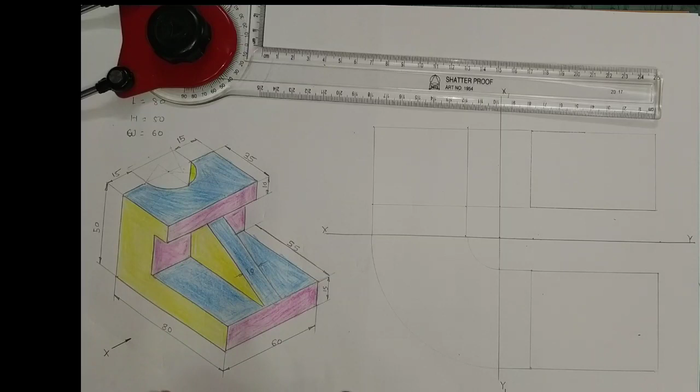Welcome to all. In this video, we shall learn how to draw the orthographic projection of this pictorial view. Along X direction, you will get the front view. Now, from top, here you will get the top view, and here in right hand, you will get the right hand side view of an object.

Let us see. The total length of an object is 80 mm, height is 50 mm, and width is 60 mm. First of all, for solving such a type of problem, draw a box of size 80 by 50 mm in front view. Also in top view, draw a box of size 80 by 60 mm. And in right hand, draw a box of size 60 by 50 mm.

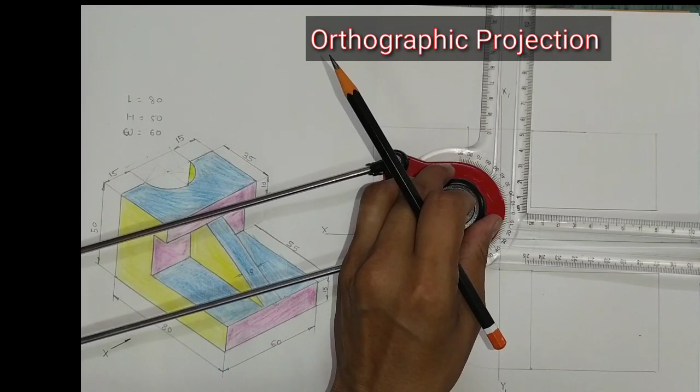Now see, along the x direction, here you will get such type of front view. It indicates the yellow portions. Now we can start this problem from this point. So along the left side you will get total length of size 80 mm. So first of all draw the total length by setting the drafters. So here you will get total length of size 80 mm. Now you will reach this point.

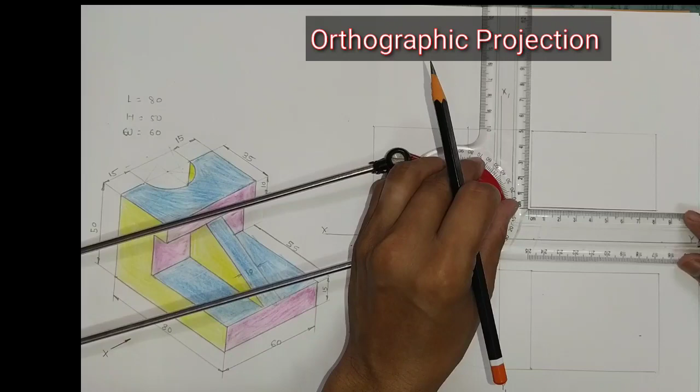After that, height is 50 mm. So from this point take a height of 50 mm. Again along the length, this distance is 35 mm. So from this point take a distance of size 35 mm. Again in downward direction, this height is 10 mm. So take a distance of size 10 mm in downward direction.

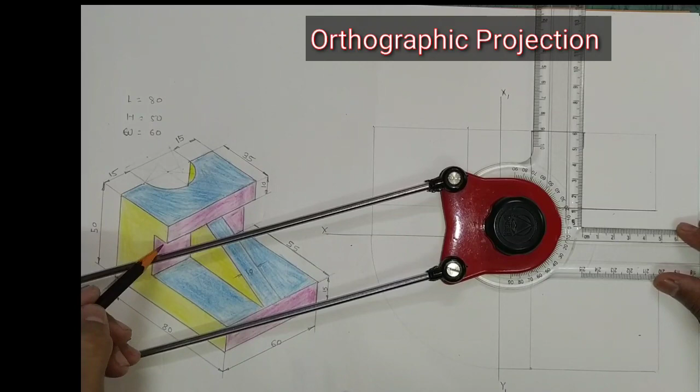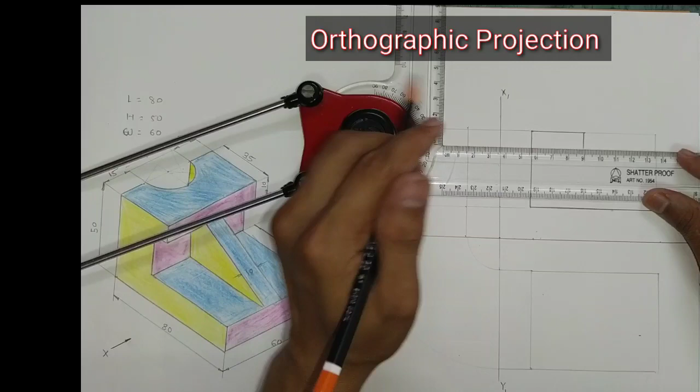Again this distance is 10 mm. How it comes? This distance from this point to this point is 55 mm, and this distance is given 35 mm. So in between, the total length is 90. So 90 minus 80, this distance becomes 10 mm. So from this point take this distance of size 10 mm.

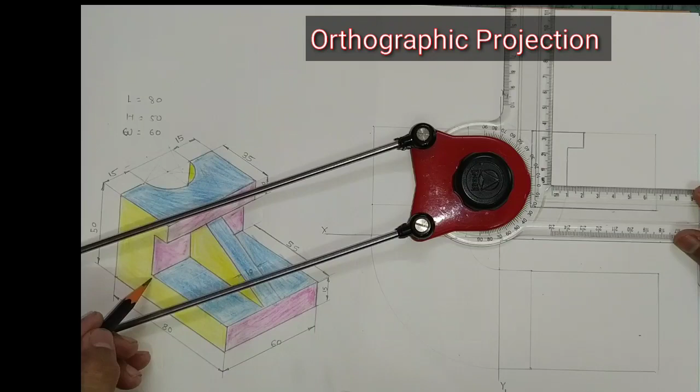Okay, and draw a line in downward direction of size 15 mm. So you will reach this point and draw a straight horizontal line, and this side becomes 15 mm. Okay, this portion represents the front view of an object, which indicates the yellow colors.

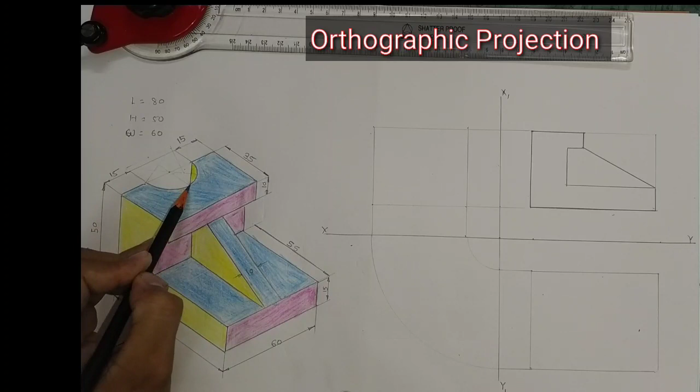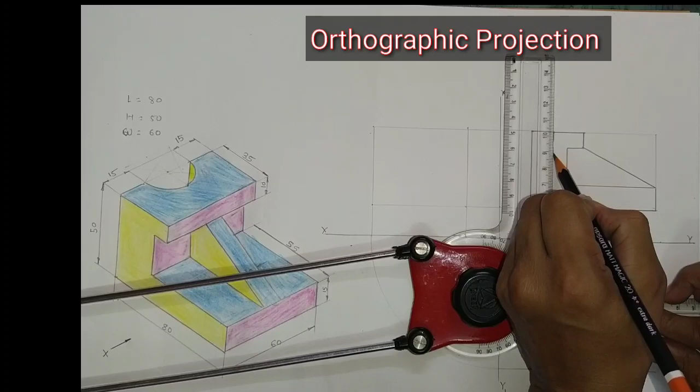Again here a rib is given. Now the rib is joined to the extreme right and below the 10 mm size. Okay, when you are looking from front, you will get the hidden lines. So this is a semicircle, and from this point you will get the dotted lines, and you can draw invisible lines. So what is the position from this point? 15 mm. So from this point take a distance of size 15 mm and draw hidden lines or invisible lines. So this is your front view of an object.

Now while drawing the top view of an object, take all the projections from front view to top view. So take the projection of all points from front view to top view. After that, draw a center line, because in that problem you will get a semicircle of size 30 mm.

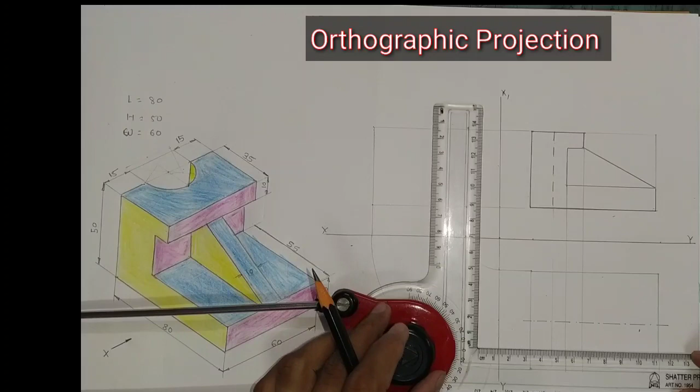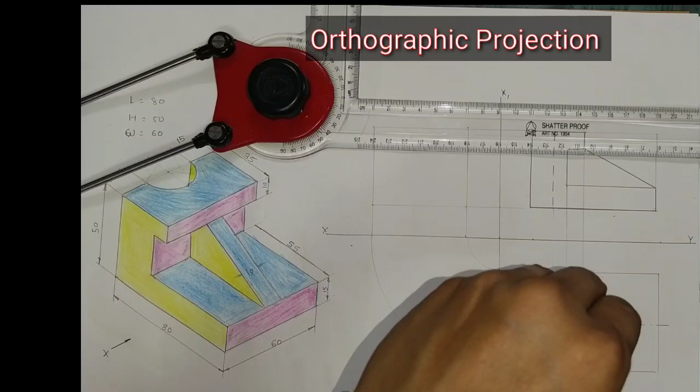Okay. Now in compass, take a radius of 15 mm and draw a semicircle. Take this point as the center and draw the semicircle. This portion represents the semicircle.

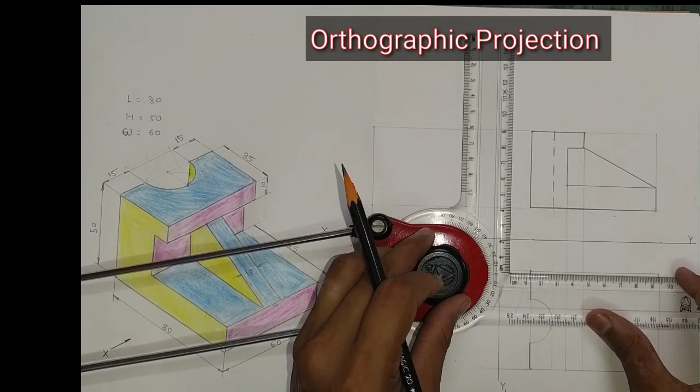After that, here you will get a straight line of size 15 mm. So from this point, draw a straight line of size 15 mm. Similarly, in downward direction, draw another line of size 15 mm. Again here you will get a straight line of size 35 mm. Horizontally draw a line of size 35 mm. Again it goes on straight horizontally.

Similarly, in downward direction, draw horizontal lines and draw a line of width equal to 60 mm. So this is your top view. Again, when you are looking from top, you will get a horizontal line of size 60 mm. When you are looking from top, here you will get a dotted line of size 10 mm. Already you took the projection of this point, so draw dotted lines.

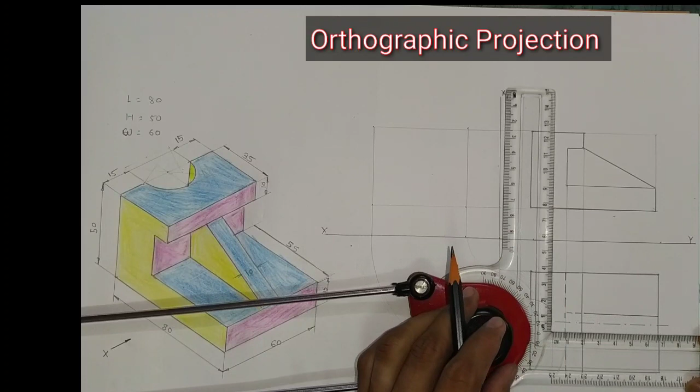Okay. Again, when you are looking from top, you will get a rib of size 10 mm. So take a distance of size 5 mm from the center line, and it intersects the hidden lines. And the remaining parts are rubbed. So this is your top view of the object.

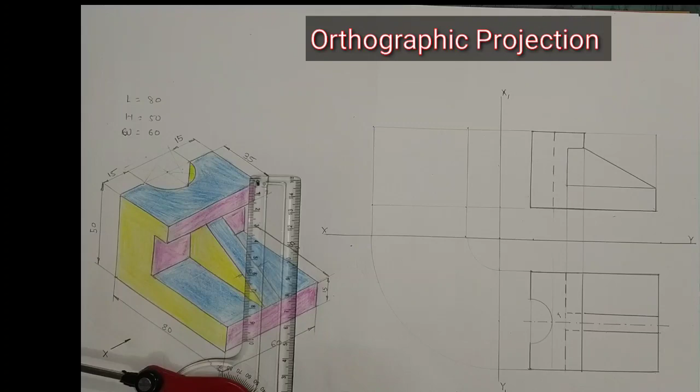Suppose I want to draw the right hand side view of an object. Transfer all the points from front view to side view and top view to side view. So first of all, transfer the points from front view to side view. Again, top view to side view.

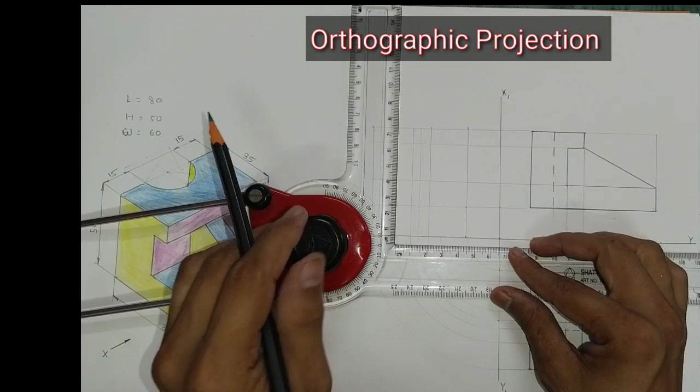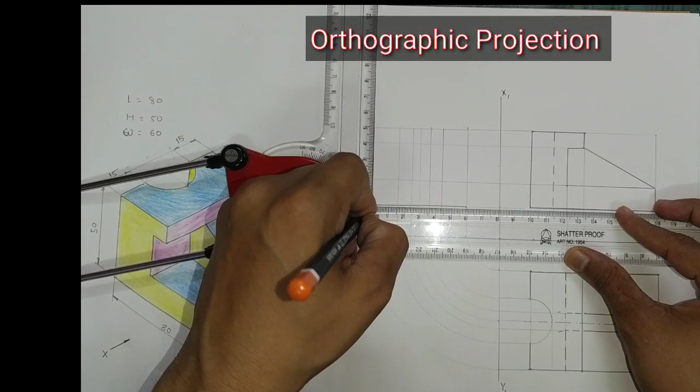Now when you are looking from the right hand side, first of all you will get a rectangle of size 60 by 15 of pink color. So this distance is 60 by 15. Okay, again you will get a rib of size 10 mm. Already you took the projection of 10 mm. So first of all, draw a rib of size 10 mm.

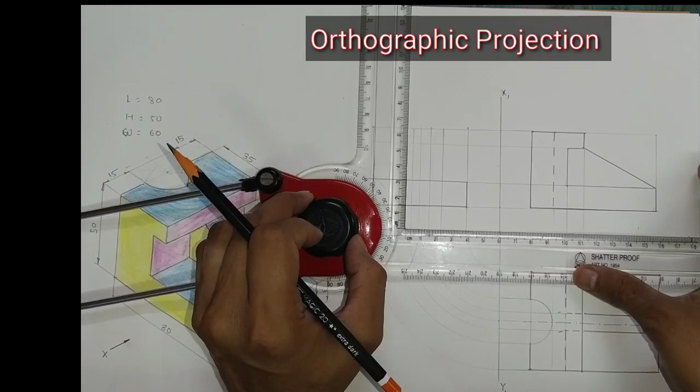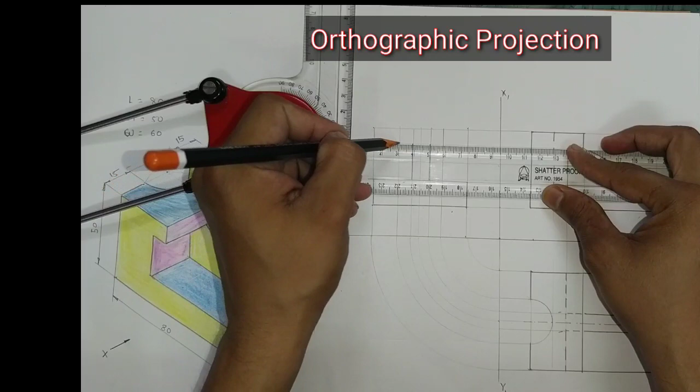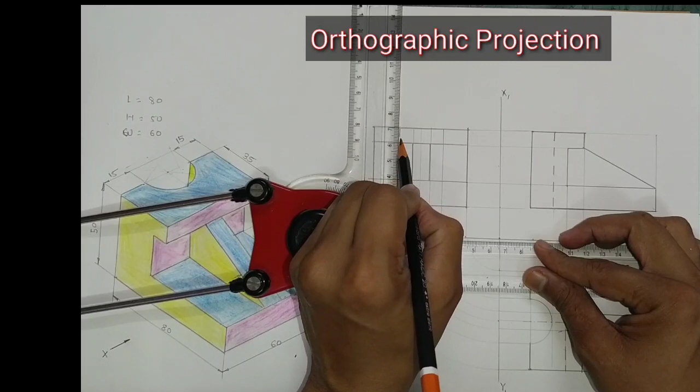So in this way we have to complete the problem. Now give the dimensions and names.